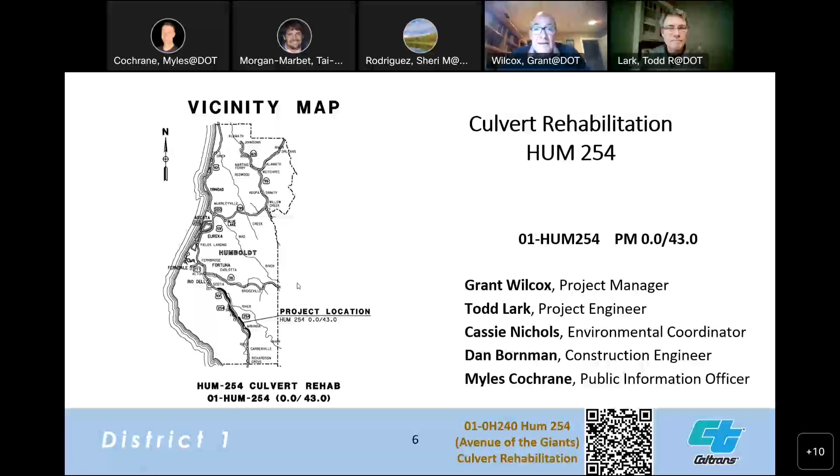Thank you, so our project team is, you've already met Myles Cochrane, he's our public information officer. He'll be one of the main focal points along with myself, who you can direct questions to. If we can't answer the questions, we'll direct them to the party that can answer your questions and address your concerns. Myles is also running the show tonight. Thank you, Myles. Todd Lark, our project design engineer, Cassie Nichols, our environmental coordinator, and Dan Bornman is our construction engineer. But tonight, Tai Morgan-Marbet will be here to answer your construction questions.

The project is located along Humboldt 254, approximately 10 miles from Garberville, at the separation of 101 and 254, post mile 0, the beginning of the Avenue of the Giants. It continues for approximately 43 miles to about 0.1 miles north of Holmes Flat Road, near the end of the Avenue of the Giants.

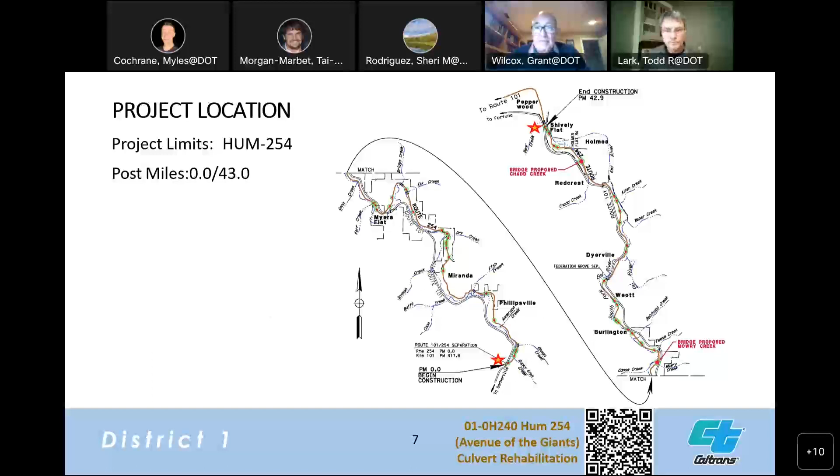Our project need: the purpose of this project is to repair and replace damaged drainage systems known as culverts. Many of these are damaged through degradation from sediment wearing through the pipe, pipe separation, or corrosion since most are metal pipe culverts. They generally have a 50-year lifespan, so it's a good idea to replace them before they fail. If we don't, voids form underneath them and additional sediment could be delivered to the South Fork of the Eel River. In the worst case, these systems could fail and collapse, causing large potholes or even roadway failure. We'd like to prevent that.

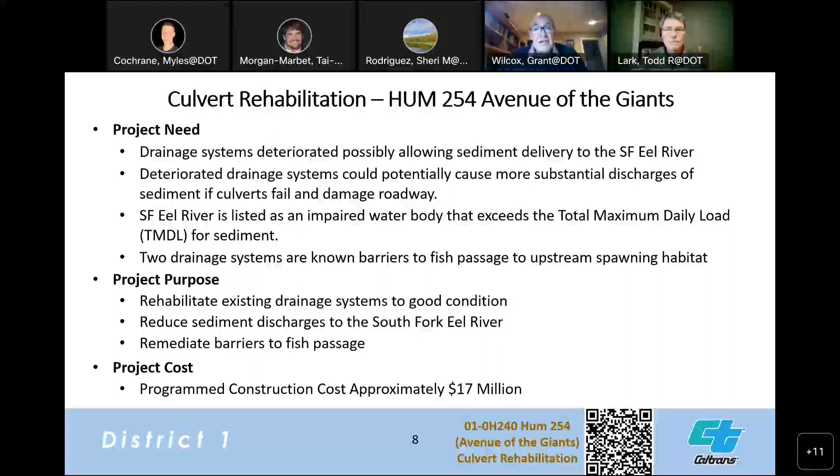The South Fork of the Eel River is listed as an impaired water body that exceeds the total maximum daily load, or TMDL, for sediment. Two of these drainage systems are known barriers to fish passage upstream, preventing fish from reaching their spawning and rearing habitat. The purpose of the project is to repair these systems, bring them back to good condition, reduce sediment discharges to the South Fork of the Eel River, and remediate these barriers to fish passage. The project cost is approximately $17 million for construction.

Project schedule: at this meeting, we're going to provide the draft environmental document, the DED, which will also be on the website and mailed out. The public will have approximately 30 days to comment, and those comments will be received in January.

Caltrans will address those comments and complete the environmental document in the spring of 2024. We'll prepare the final plans, finished in the fall of 2025. Permits and right-of-way acquisition will be done by the winter of 2026, and construction will begin in the summer of 2027, proceeding through two seasons, completed in the fall of 2028.

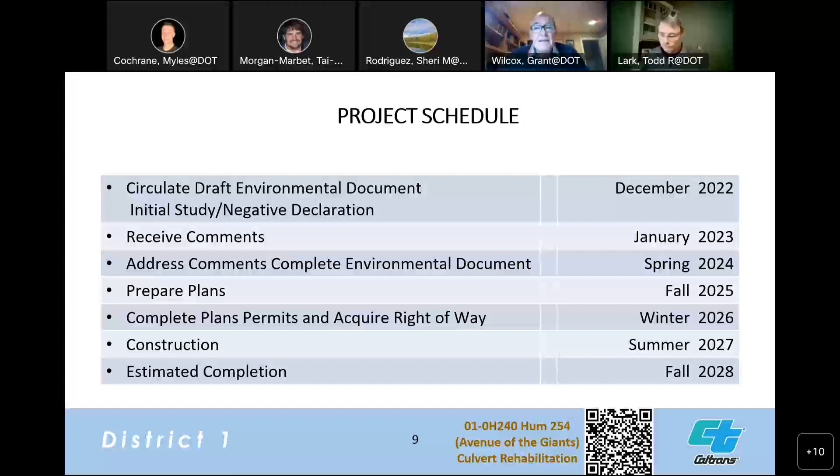And with that, I'll hand it off to our design engineer, Todd Lark.

Thank you. I'm Todd Lark, the project engineer for this culvert project to replace a large number of culverts on the Avenue of the Giants, which happens to be in Humboldt Redwoods State Park as well. So we can go to the next slide. I'll leave it here for the moment.

The intent, as Grant pointed out, was to address the poor condition of some rather old culverts, minimize potential sediment discharge, and address barriers to fish passage. This list includes quite a few culverts, about 45 of them, and quite a few are actually going to be increased in size.

That increase in size is to address some local flooding as a result of undersized culverts. It won't address any flooding from the Eel River itself, but any local storm flooding should be minimized as a result of the larger culvert sizes. The larger sizes will also reduce velocities passing through those culverts, reducing erosion and restoring the drainage systems to good condition. As noted previously, it will also remove a couple of known barriers to fish passage.

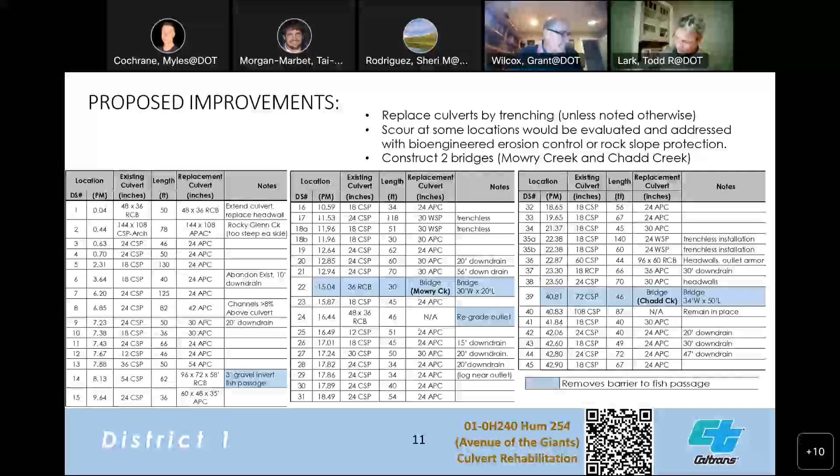By and large, most of the culverts will be replaced using the trench, or cut and cover, method, where we'll be trenching across the highway. To accomplish this, we'll be trying to maintain reversing traffic control so it won't close the road down entirely.

Most will be pretty quick with smaller diameter culverts, similar to what you see in the lower left corner there, where one side of the road could be replaced and then the other, with traffic going back and forth. There are a couple of good-sized box culverts and an arch culvert, and I've got photographs further down showing that one. Okay, we'll go to the next one.

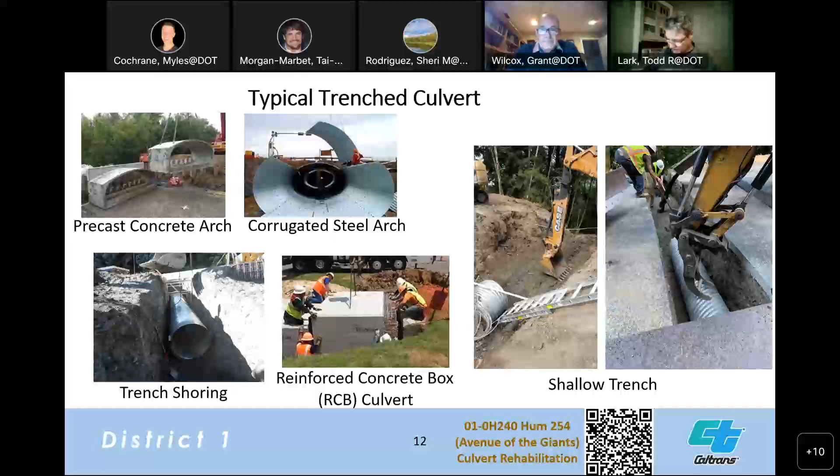So aside from the trench culverts, we've got a couple of locations where, because of their extreme depths in excess of 20 feet deep, we'll be using trenchless technologies. It typically would be a jack and bore operation.

Two of those locations are at the Hidden Springs campground. These particular operations would be less impactful to the road itself, because the work would be taking place off of the roadway.

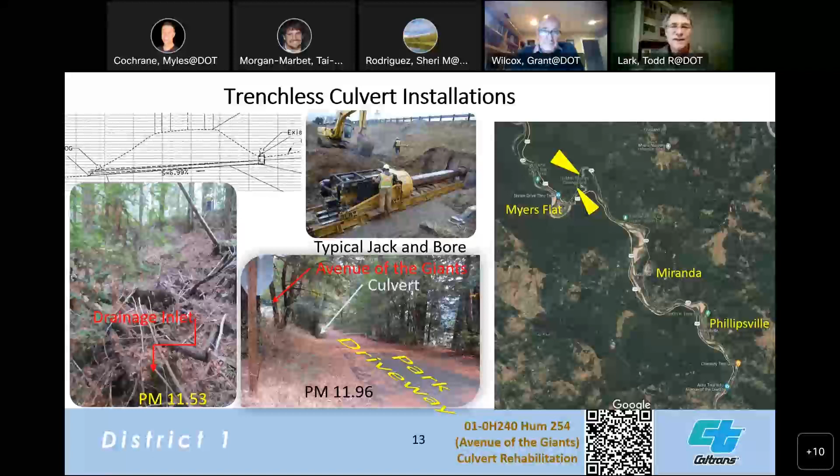The other location is at the High Rock Conservation Camp entrance, where the culvert is close to 30 feet deep. So the expectation is that we would be jacking the pipe between the space of the existing access road and the highway. There's a couple of photographs of what that might look like.

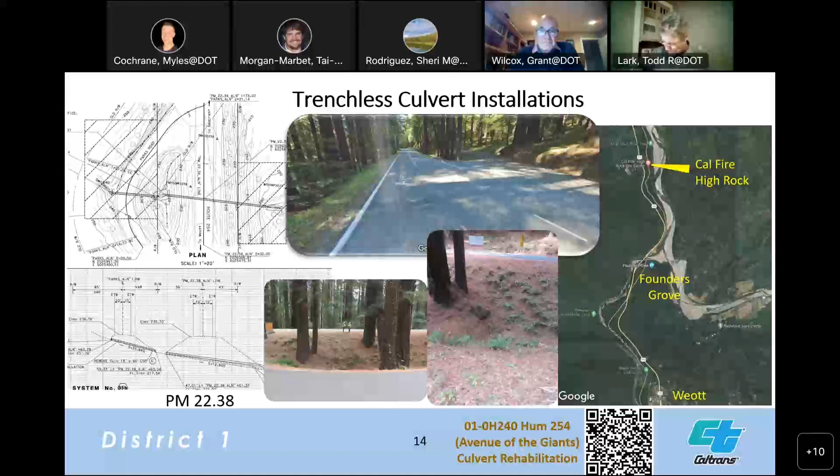So here's a couple more images of what a trenchless operation might look like. Basically, you'll end up with welded steel pipes that are pushed through.

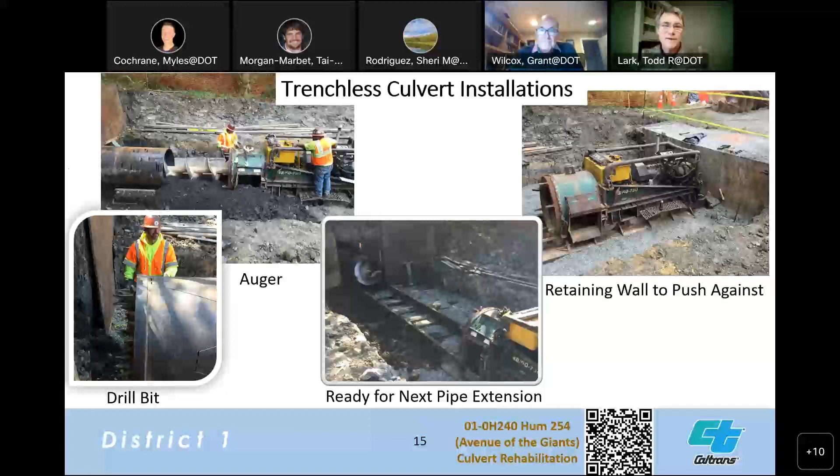The fill slope under the highway, and the space needed is pretty significant, because they generally will be placing 20-foot lengths of pipe to do it, and then they'll auger the soil out from the pipe. They use a thrust block of a sort, a photograph of which is on the right there. That's what they push with. So it gives you an idea of the size of the excavations for that operation.

This is one of the creeks that's going to be addressing fish passage by removing the barrier. Presently there's a 3-foot box culvert at this location, very close to the campground entrance, or the visitor center at Post Mile 15.

And a couple of things that we'll be doing here. The construction process, in order to keep the road open, we're expecting to build half a bridge at a time, and we're planning on using best managed or accelerated bridge construction techniques, trying to have as many pre-assembled parts as we can in order to expedite the actual construction.

So our initial approach on this particular bridge is to build the southbound half of the bridge onto the left or west of the existing alignment, while accommodating reversing traffic on the right side. Once that left half is constructed, then we move traffic over to that side and complete the bridge construction.

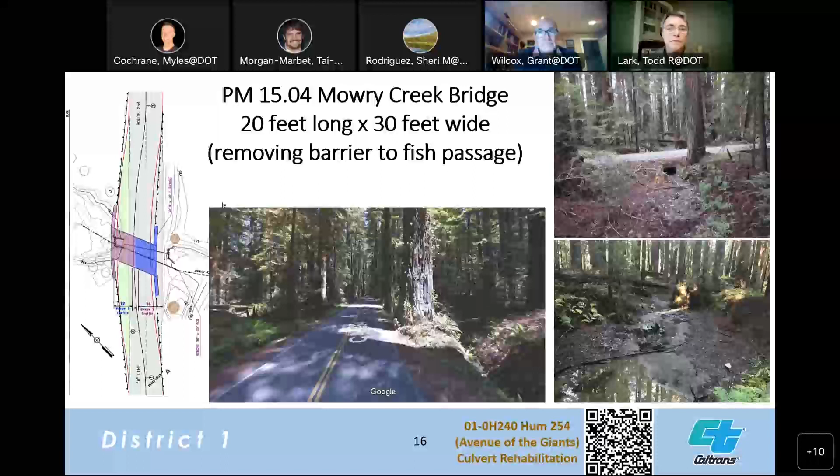There's a couple of redwood trees you'll see in the center photograph that are quite close to the highway, so the finished alignment will leave the road with a slight kink in it, but it's going to be wider. Presently there's 2 10-foot lanes there. The proposed section will have 11-foot lanes and 2-foot shoulders, and we're trying to maintain a greater clearance from those redwood trees in order to minimize any impacts to the roots on those trees.

Chadd Creek is to the north, at post mile 40.81. The plan is to restore the channel to its original alignment, which is upstream of where it's currently passing. In the layout, the darker gray is where we're planning on constructing the bridge, which will be about 50 feet long.

There's presently a very poor condition 6-foot diameter culvert there, that was the previous culvert. Where that channel is in the lower right photograph, you can see some old abutments from a very old road, probably from an earlier alignment of the highway, but those abutments would be removed and the stream restored.

The upper photograph shows downstream of the existing channel, and where that confluence would be with the realigned culvert. So the existing culvert that the creek is presently passing through will continue to pass through there, only with localized drainage. The remainder of the creek will be diverted to its historic channel further south, as you can see in the photograph.

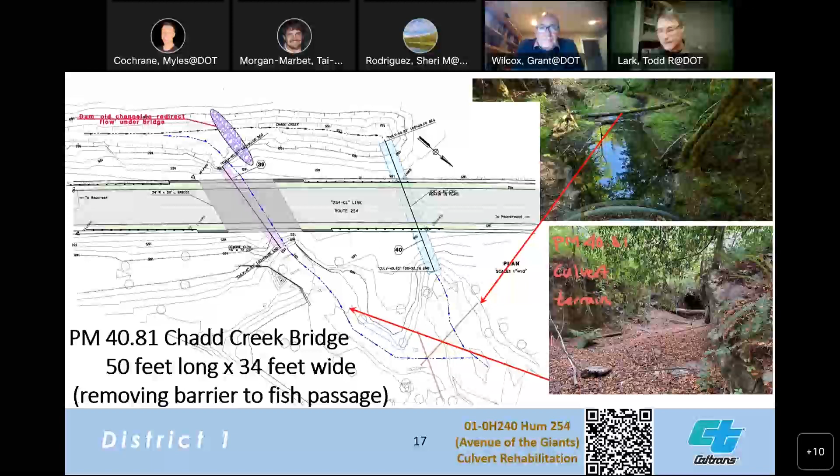Next, a couple of examples of the bridge rails. There's a new bridge project at Fish Creek at post mile 4.2, at the south end of the Avenue of the Giants, and that's a rendering of what that might look like for that project, which will be in construction this coming summer.

The photograph on the left is another bridge a little further south of Fish Creek that's got an earlier version of the same type 80 bridge rail.

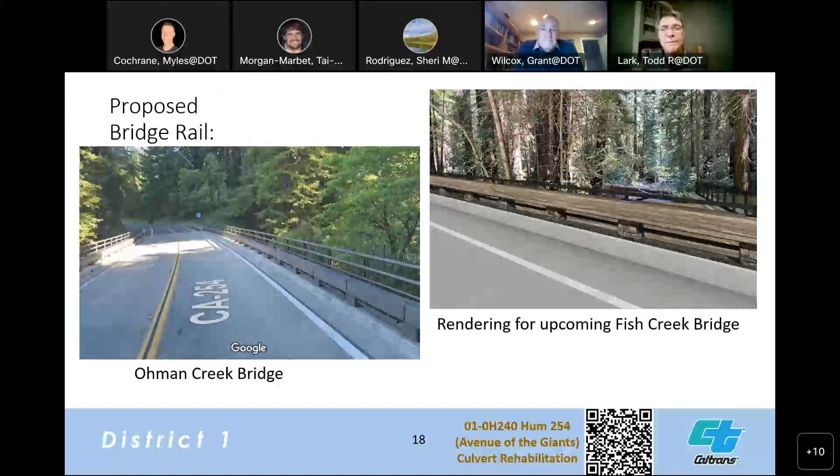This is an example of a recently constructed project at Little Lost Man Creek, just to give an idea of how big of a change you might expect. There was an existing box culvert, shown in the center photograph, and to the right are the recently completed photographs. That was constructed under half-width construction, where we had reversing traffic on one side at a time. There's a couple of construction photographs on the left.

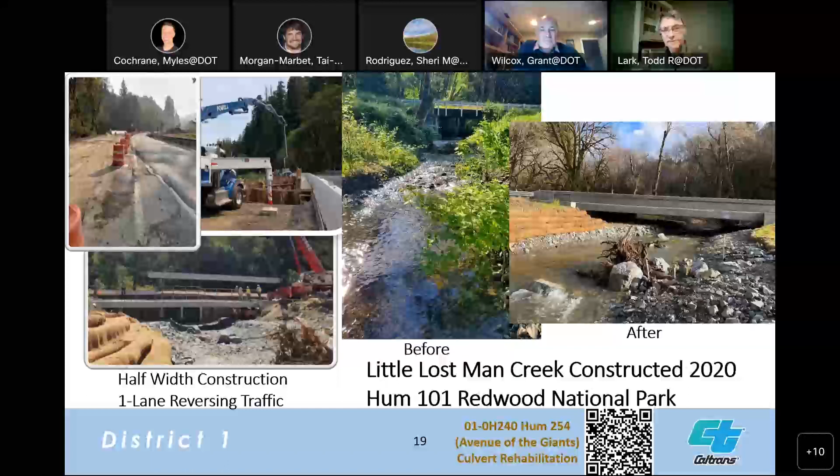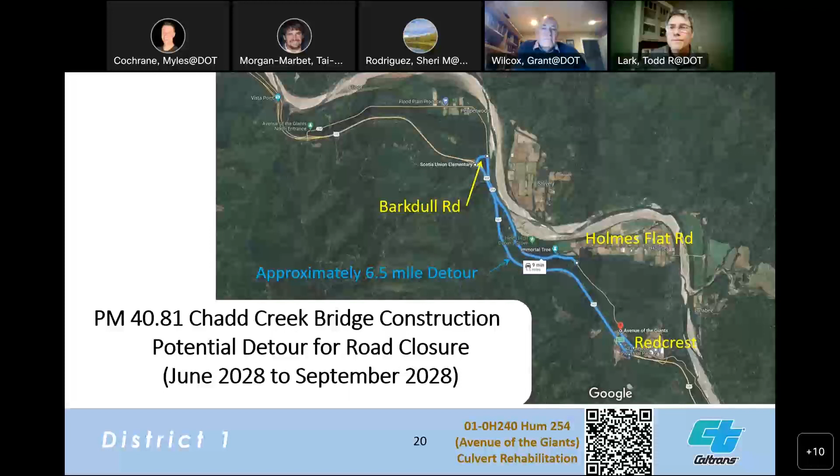At Chadd Creek, because the roadway would be closed for that construction, we're expecting the detour would be about 6.5 miles long. The time frame we're expecting it to be constructed, using those same accelerated bridge construction techniques, would take from maybe June to September. It could be in 2027 or 2028.

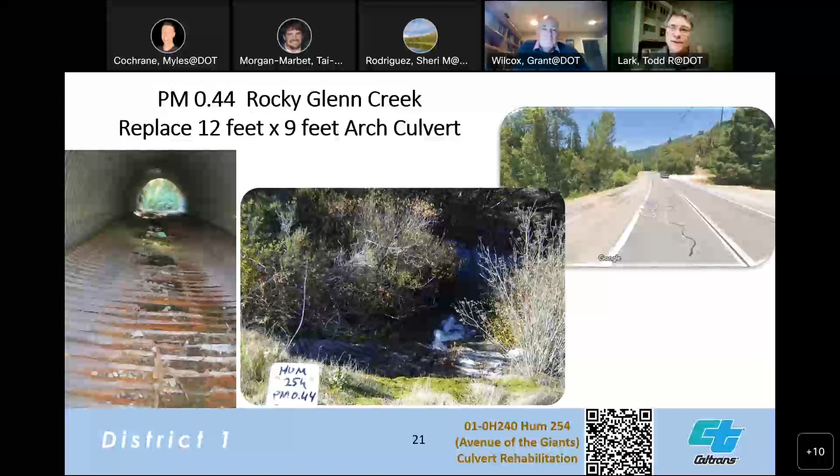A culvert like this will take probably a little bit longer than those overnight sections. It may take a few days, and we'd expect that to be handled with reversing traffic and flagging. If not, as we progress through the project, we'll consider whether we do something more robust.

Another culvert, this particular one was listed as a barrier to fish passage, and in this case we'll be replacing that with a concrete box culvert, going from a 4.5-foot diameter culvert to an 8-foot by 6-foot box culvert. So the flow line of that culvert would be below the water level you see in the photograph with the water at the outlet, removing that barrier to fish passage.

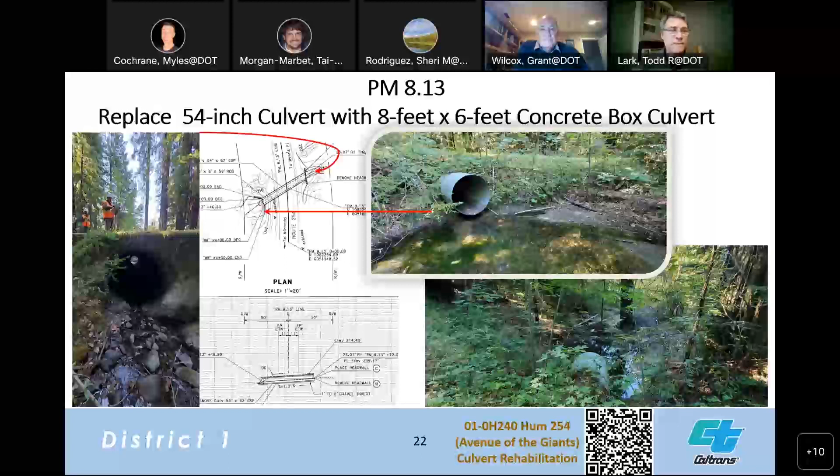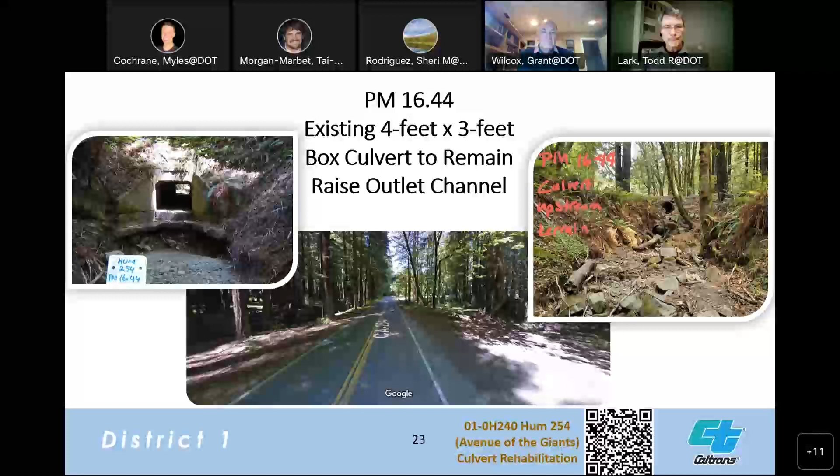Another one: this culvert is very near the visitor center for the park, and the culvert itself is in good condition. However, the outlet is deteriorated, so the plan is to raise the flow line of the stream back up to the elevation of the outlet of that culvert. The armoring we'll be using will be some blend of rock and woody debris.

I'll pass that on to Cassie now.

Hello, my name is Cassie Nichols, and I am the environmental coordinator for this HUM 254 Culvert Rehab project. I'll be giving an overview of the environmental review process and talking about some of our measures and best management practices.

Per the California Environmental Quality Act and the National Environmental Policy Act, the project must go through an environmental review process to evaluate potential impacts to the environment. The analysis of these impacts is included in the California Environmental Quality Act environmental document. Our process started with the need identified of the poor and failing culvert systems, which developed the project purpose to rehabilitate these drainage systems. Once our purpose and need was established, environmental studies began, evaluating the setting of Highway 254 and our proposed work. Environmental areas reviewed include visual, cultural, biological, hazardous waste, wildfire, traffic, and water quality, just to name a few.

Following this analysis, an initial study negative declaration was prepared because there would not be a significant impact to the environment or to cultural or historic properties, as the majority of the work of this proposed project is within the existing roadway.

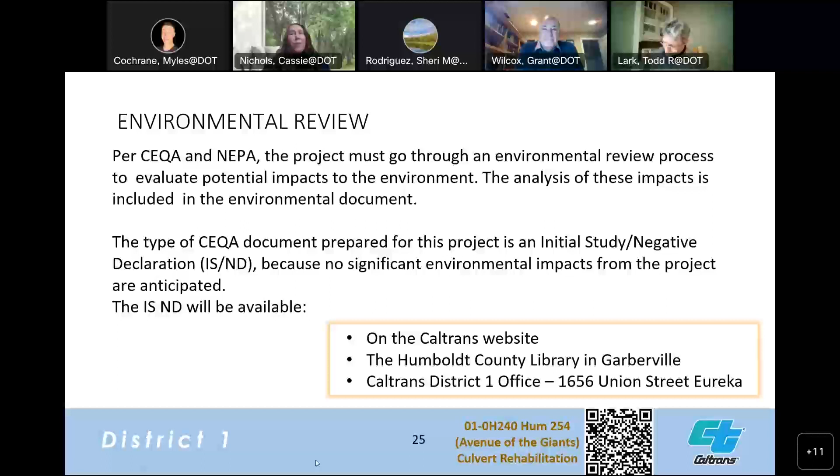Following the environmental document, Caltrans would move forward obtaining environmental permits, finalizing our design process, and moving toward construction, which is currently anticipated about 2027.

So I have... there we go. Measures and best management practices. I've been asked a lot why construction work may be completed during certain times of the year, and that often corresponds with Caltrans measures and best management practices.

Caltrans has many standards that we follow, but I will just be highlighting a few of the environmental ones that will apply to this project to give you an idea.

To begin, this project will have an in-stream work window of construction only allowed June 15th to October 15th to protect the most vulnerable stages of aquatic life. This time period also occurs when drainage systems typically have little or no water, which is also a little convenient in replacing culverts. If water is present, a clear water diversion would occur and an aquatic species relocation plan would be developed and in place during construction with a biologist on site for all in-water work.

So yeah, the bigger consideration is going to be traffic throughout this project, so coordination is going to be quite important. And aside from some of the other constraints that Cassie just mentioned, there's also the practical constraints of replacing culverts. Generally that can't happen in the wintertime for that practical reason. So we're expecting, due to the number of culverts to be replaced, it's going to take 2 seasons to do that.

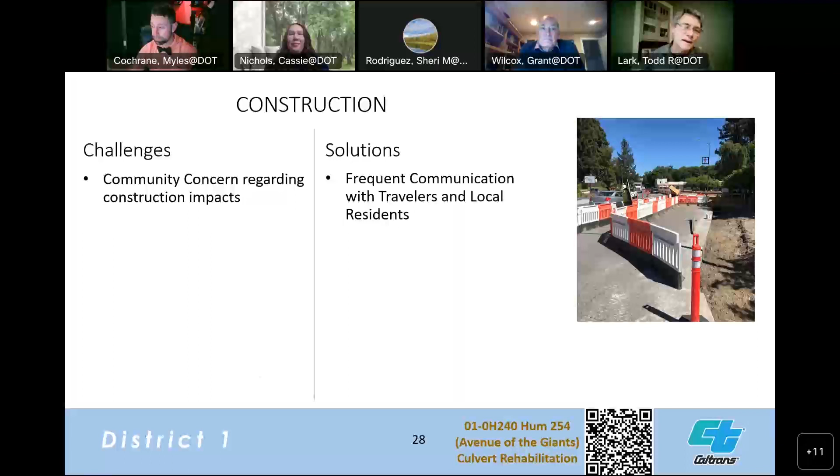So some of the considerations, generally, outside of the Chad Creek Bridge construction, we're anticipating maintaining reversing traffic control throughout the rest of the Avenue of the Giants to minimize the impacts to the traveling public, and it is a destination for so many people. And with the 2 seasons, it should allow a lot more time for planning to be able to expedite any construction of those bridges to minimize those impacts as well. And that's all I had for that.